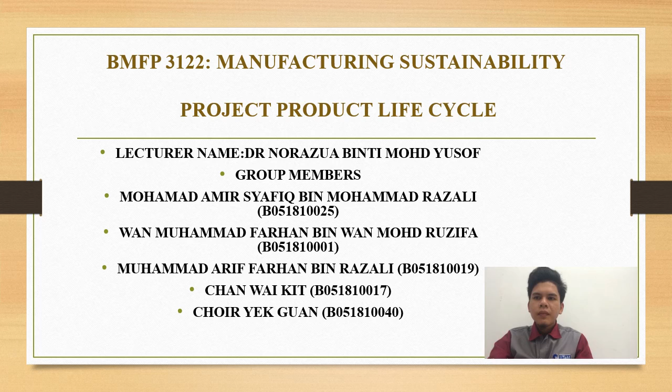Hello and Assalamualaikum. My name is Muhammad Arif Farhan bin Razali, and today I would like to present about my group project, which is about manufacturing sustainability.

Today, most of the pollution comes from industrial pollution. The manufacturing waste material or substance generated during the manufacturing process causes environmental pollution. The growing awareness of the link between goods and environmental concerns has increased interest in this topic during the past several decades.

Today, life cycle assessment is well established and widely accepted as a tool for determining a product's environmental profile. With the implementation of design for environment and life cycle, our group can produce this product without decreasing its environmental performance.

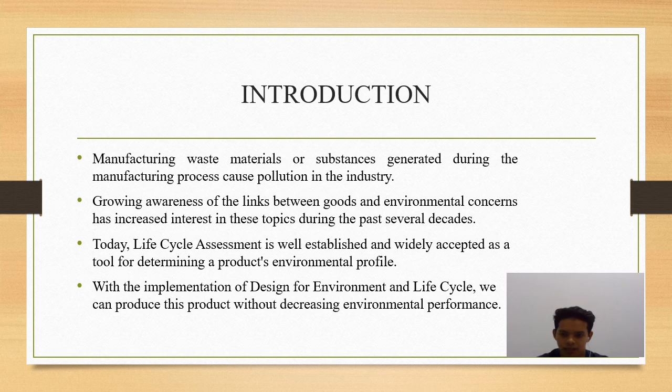Next, I would like to discuss the objectives of our project. First, we are able to apply the life cycle for motorcycle manufacturing process, and second, we are able to establish design for environment concept and method. Third, we are able to conserve the environment from the harmful manufacturing process, and fourth, to create and redesign a process for an existing product without affecting its functionality.

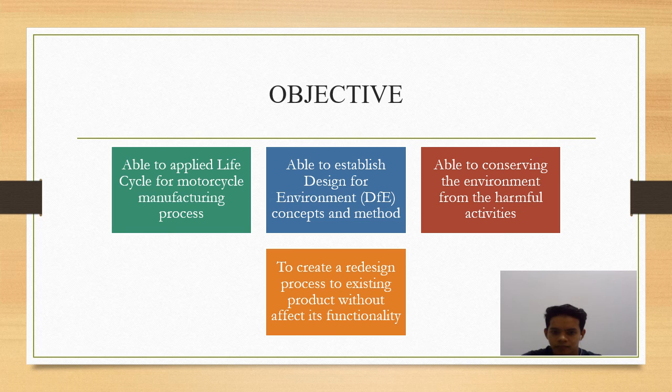Assalamualaikum warahmatullahi wabarakatuh. My name is Wan Muhammad Farhan bin Wan Mohd Ruzifa. Today I will present the literature review. The first one is green manufacturing sustainability.

Green manufacturing is increasingly evolving as the alternative to sustained manufacturing that has the potential to solve more of the problems facing the world today. From conceptual design to disposal, green manufacturing spans the entire product life cycle in a harmless way, having little or minimal environmental impact through efficient resource usage and waste and pollution reduction. The industry must slowly implement the concept of reuse, reduce, recycle, redesign, remanufacturing, and recover.

Next, the second part is design for environment. Manufacturing industry redesigns a product based on a few principles of sustainability such as sustainable design, eco design, green product innovation, life cycle, and design for environment (DFE). Although these principles might differ in terms of definition, they still use the same overlapping considerations such as design for disassembly, removal of toxins, and use of life cycle assessment (LCA).

Environmental factors are incorporated into the product design and end product process at DFE. Firms utilize the DFE method to improve product environmental performance while reducing costs, increasing competitive advantage, and developing innovation. The DFE process can involve designing products that use environmentally friendly material, fewer resources, and less packaging. DFE can also focus on designing products that are more easily recycled, reused, or upgraded, so that the goal of DFE is to reduce or eliminate waste, reduce energy consumption, and maximize the use of recovered material throughout the product life cycle.

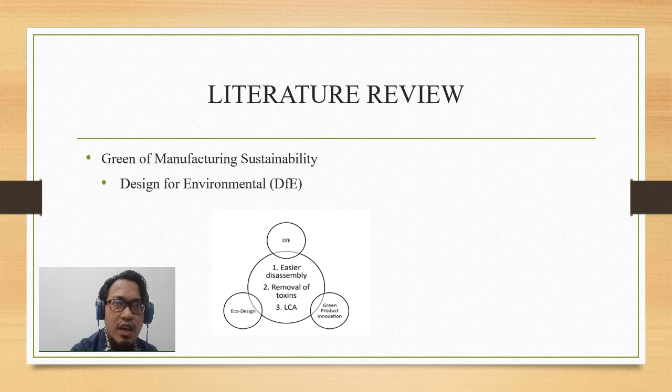That's all. Good afternoon Doctor and my friends. My name is Chan Wai Kit. I would like to present the next part, which is methodology.

The first step is to decide the product. The second step is to identify the waste. The third step includes product life cycle analysis, eco design web, and eco indicator analysis, which we carry out at the same time. After that, we do the data interpretation. Then we try to improve and redesign the product. The next step is discussion, and after that we do the conclusion.

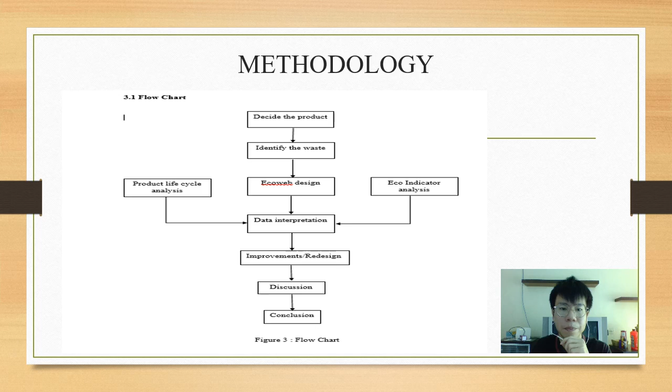Here is the life cycle sketching diagram of the product. The first one is copper, the second is steel, the third is metal, the fourth is aluminum alloy, the fifth is plastic, and the last is aluminum. So here are 6 life cycles of the material.

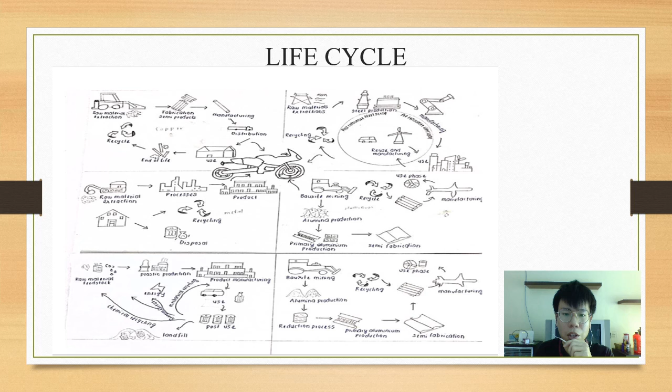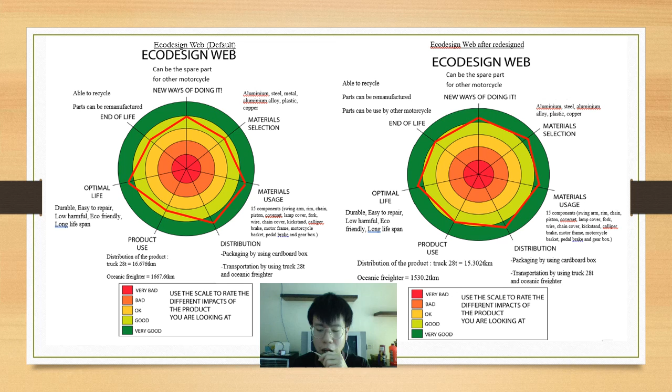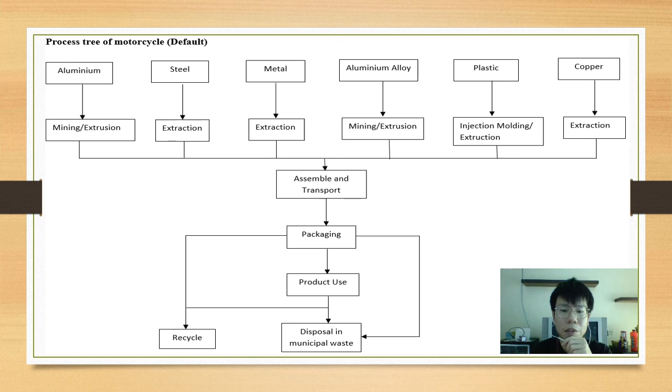Here is our process tree for the motorcycle. We have 6 materials, and all of the materials undergo different processes. After that, the packaging can be recycled or disposed of.

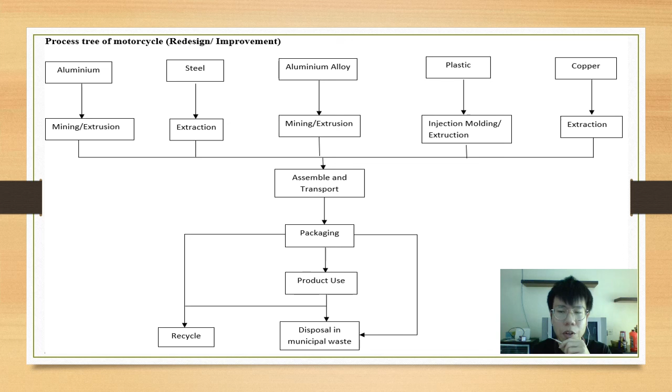This is the process tree of the motorcycle after redesign. From the process tree, we know that we already reduced one material, which is metal, and we also reduced the manufacturing process. After reducing the manufacturing process, we can reduce the emission or waste of material.

Eco Indicator 99 is a life cycle impact assessment tool that helps designers make an environmental assessment of a product by calculating eco indicator scores for material and process use. The resulting score provides an indication of the area of impact for the product. It offers a way to measure various environmental impacts and shows the final result as a single score.

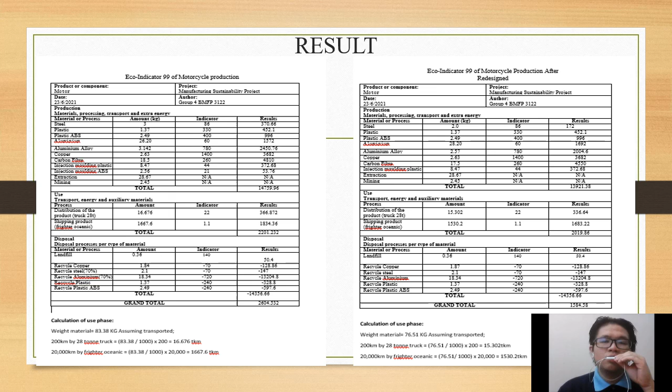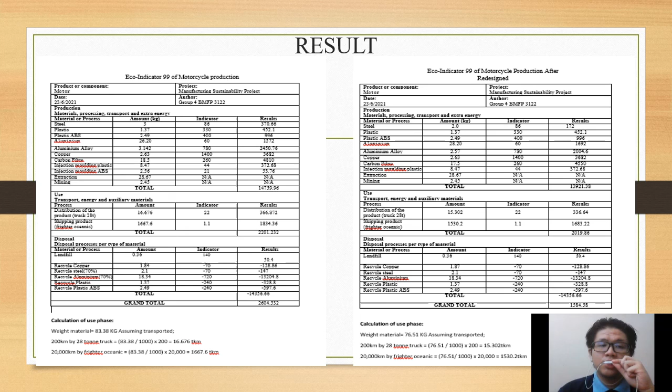In this table, the weight of material reduced from 83.38 kg to 76.51 kg. Due to the changes of weight and material, the transportation score also changed from 2201 to 2019. After the motorcycle was redesigned, the eco indicator grand total score changed from 2604 to 1584. Based on the result of the product life cycle eco design with eco indicator, the motorcycle needed to be redesigned.

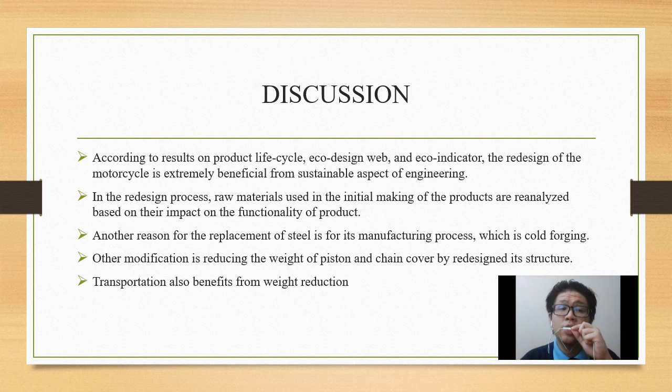In the redesign process, raw materials used initially were reanalyzed due to their impact on the functionality of the product. We replaced steel with aluminum because its manufacturing process uses forging. Another modification is reducing the weight of the piston and chain cover by redesigning its structure. Transportation use also benefits from the weight reduction.

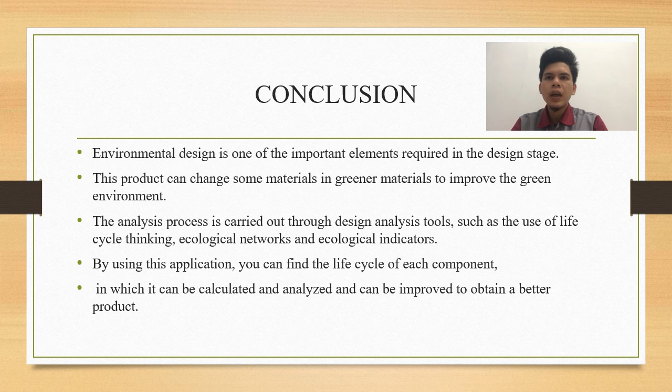For the conclusion, we can conclude that environmental design is one of the important elements required in the design stage. The aim is to design and develop motorcycle parts that consider the economy, society, and green environment. When material can be recycled and disposed of, costs are reduced, and society and economy will be improved. That's all, thank you.